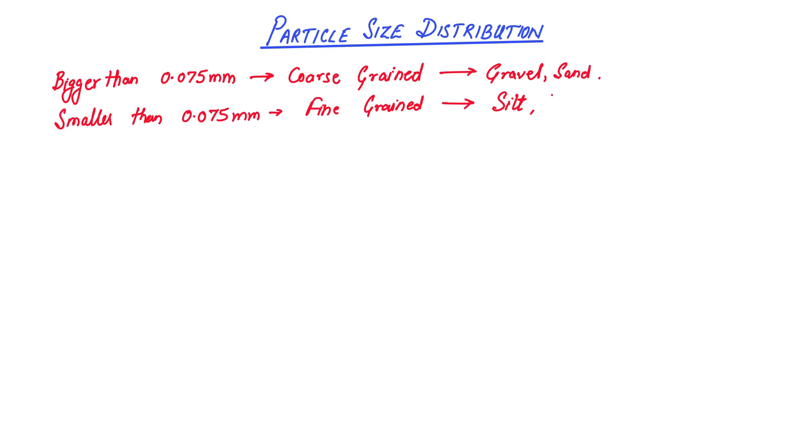And this basic classification is important. Among the fine grained soil, we count silt and even clay. But there is an important differentiation in the property of these two types of soil, and that is the cohesion. Fine grained soils are generally cohesive, whereas coarse grained soils are cohesionless. Now, what is meant by cohesion? Cohesion is the force of attraction between the soil solids.

So in the cohesive soil, particles are bound together by the force of attraction, and that is the cohesion. So if I am dealing with a cohesive soil, it will be difficult for me to separate each and every individual soil solid. So for that, we perform sedimentation analysis for the particle size distribution of cohesive soil, whereas for cohesionless soil, we simply perform sieve analysis.

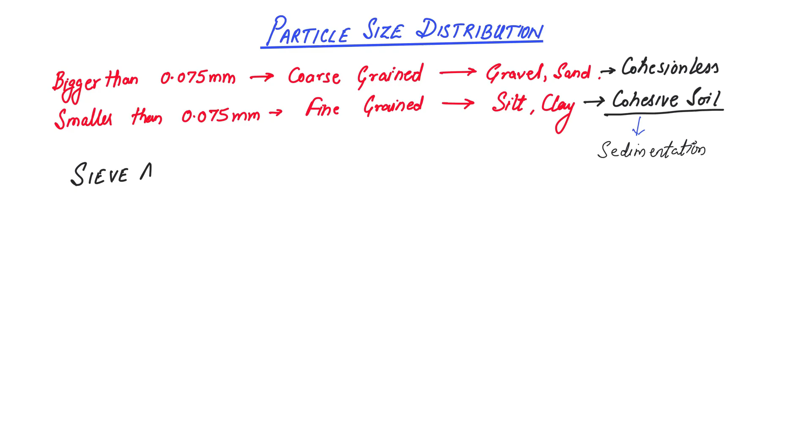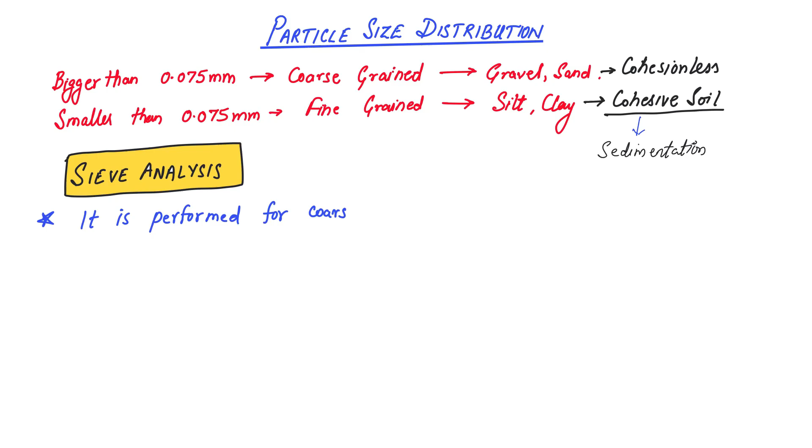In this lecture, we are going to study the sieve analysis performed for coarse grained soil. As I just said, coarse grained soil is soil having particle size bigger than 0.075 mm. So make a note: sieve analysis is performed for the coarse grained soil only. Why only for coarse grained soil? The reason is very clear.

What is the reason? It is difficult to separate individual solids of a fine grained soil on a sieve. So that is why we don't perform sieve analysis for fine grained soil, because its individual solids cannot be separated easily during sieve analysis. Now, what is a sieve analysis?

Sieve analysis is a very simple procedure where we stack sieves of different opening sizes on each other. For example, this is a stack of sieves having different openings. On the top, we keep the sieve having the biggest opening, whereas at the bottom we keep a pan, and above the pan there will be a sieve having a fine opening. So as we go downwards from the top, the size of the sieve opening keeps reducing.

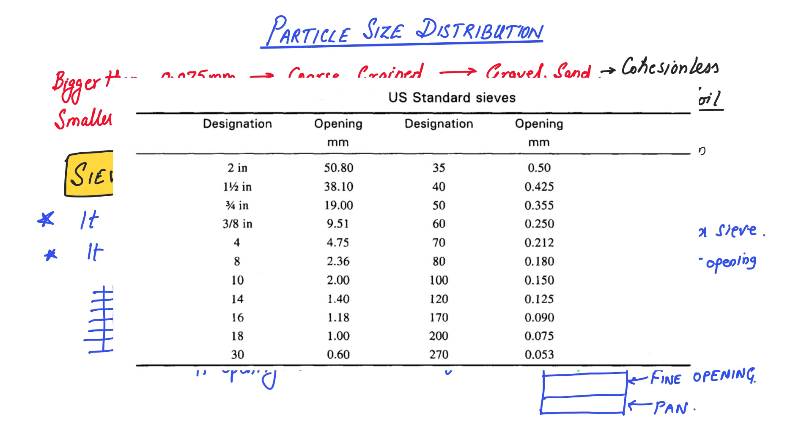Now let us understand more. When we perform sieve analysis, first of all what we are going to do is check how much amount of fine-grained solids are present there.

If there is any fine-grained solid, then we have to deduct that from the total mass of the soil. So now we are only going to take some coarse-grained soil. This soil is taken, dried, and its dried mass is taken.

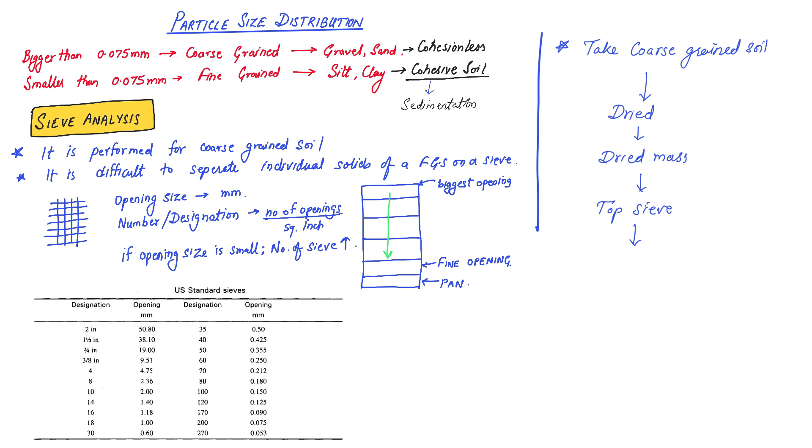This dried mass is then dumped into the topmost sieve. Once the whole mass is dumped on the top sieve, we shake the tower of sieves. This shaking is done either using mechanical shakers, or we can also shake the sieve tower by hand.

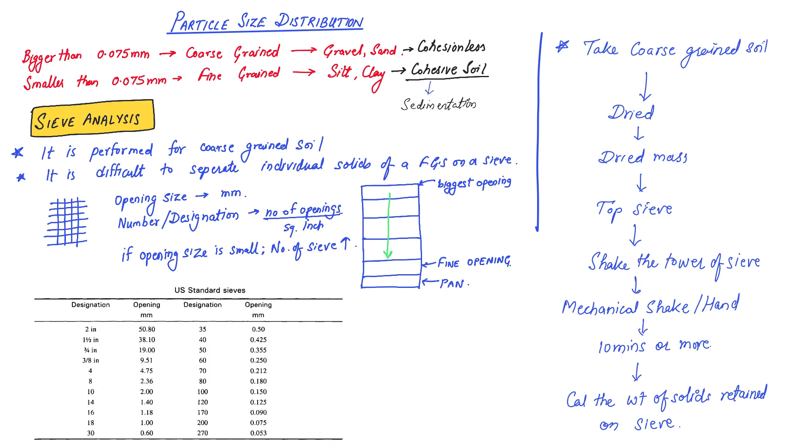After around 10 minutes or more, when we are satisfied that whatever particles want to pass down a particular sieve have already passed, we stop the shaking and calculate the weight of soil solids retained on each sieve. Finally, this weight is reported in a table, in which we will understand how to perform the calculation.

Now let us understand that this is your sieve and there are various sieves that you have used here. Let us suppose a 20 mm sieve, a 10 mm sieve, then 4.75 mm, 2.36 mm, 1.18 mm, a 425 micron sieve, and finally a 75 micron sieve. 75 micron is nothing but 0.075 mm.

After doing your sieve analysis, you have noted down the weight of soil retained on each sieve, in grams. I am assuming you have already observed those weights. For example, on the 20 mm sieve 200 gram is retained, below that 150 gram, below that 100 gram, then below that 250 gram.

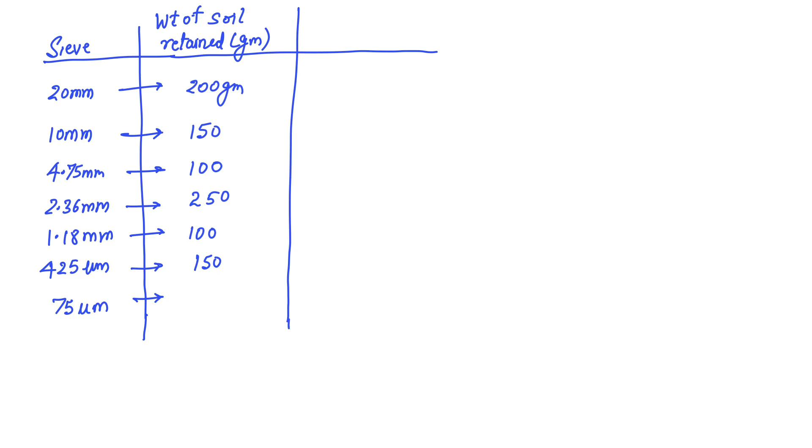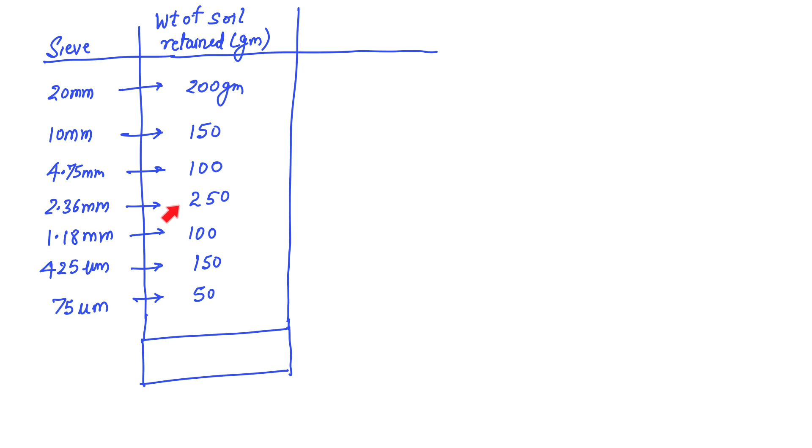And what is the total? Below that, let us suppose 100 gram is retained, then 150 gram, and at the bottom 50 gram. Just to make our calculation simple, add them all: 350, 450, 700, 800, 950, and 50 gives 1000 gram. So for easy calculation, the total mass of the soil is 1000 gram. That is the observation from the sieve analysis.

After that, you make another column in which you calculate the cumulative weight retained. What is cumulative weight retained? It is the total of all the sieves at that level and above. For example, above 20 mm there is no other sieve, so the cumulative weight will be 200 gram. After that, 200 plus 150, that is 350.

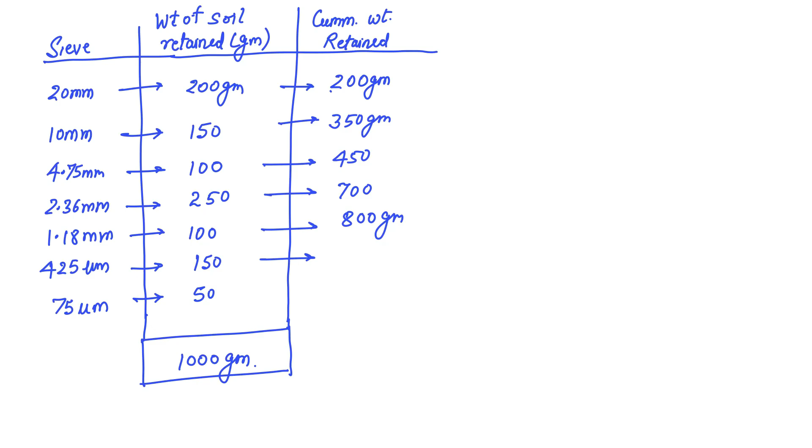After that, 350 plus 100 will be 450 gram. 450 plus 250 is 700 gram. 700 plus 100 is 800 gram. 800 plus 150 is 950 gram. And 950 plus 50 will be 1000 gram. So obviously these two should be matching.

This is column number 3, and now you calculate the percentage cumulative weight retained. The total value is 1000 gram. Out of 1000, 200 gram is 20%, 350 is 35%, 450 is 45%, 700 is 70%, 800 gram is 80%, 950 is 95%, and 1000 is 100%.

The last column we calculate is the percentage finer, which equals 100 minus percentage cumulative weight retained. So 100 minus 20 gives 80, 100 minus 35 gives 65, 100 minus 45 gives 55, 100 minus 70 gives 30, 100 minus 80 gives 20, 100 minus 95 gives 5, and 100 minus 100 gives 0.

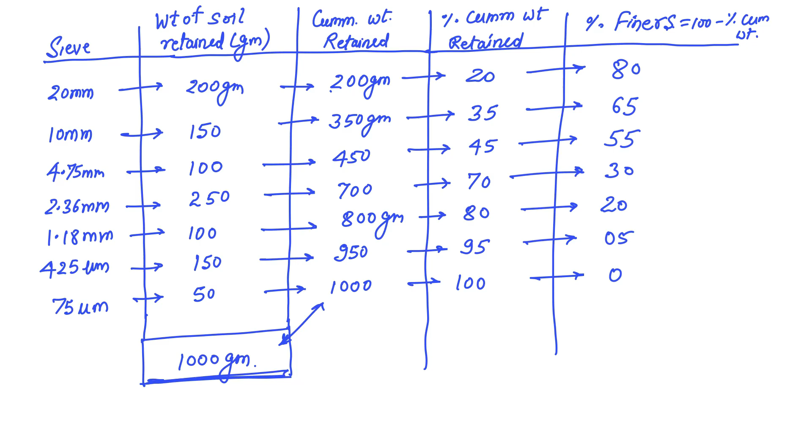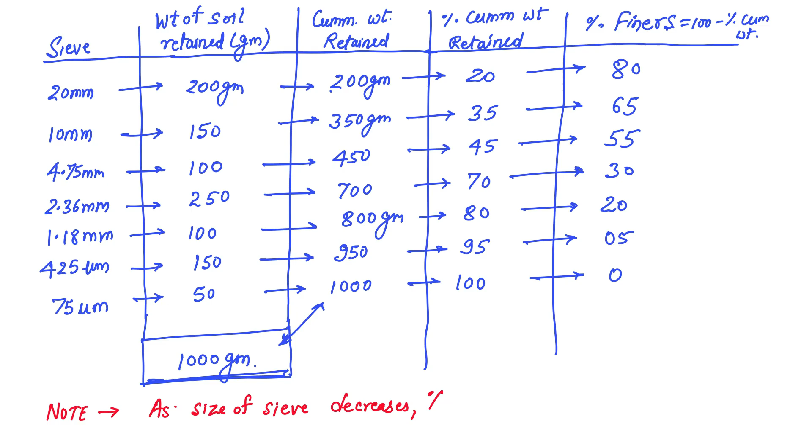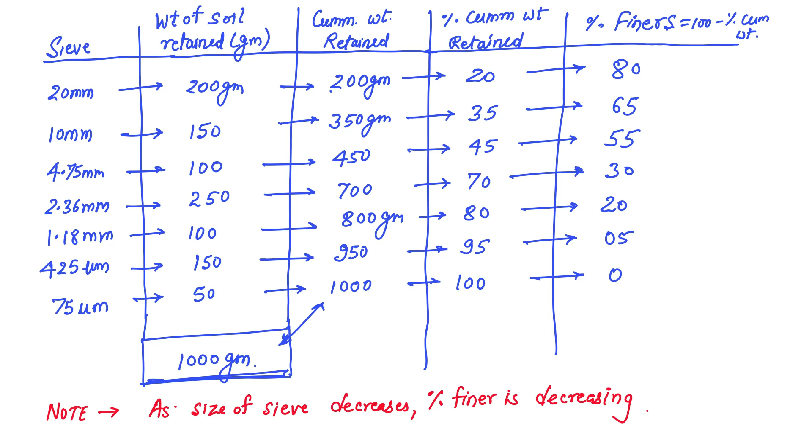This calculation shows us that as the size of the sieve decreases, the percentage finer is also decreasing. That is the observation I wanted you to make from this table, and the values of this table are going to be plotted on a graph to form the particle size distribution curve that we are going to study in our next lecture.